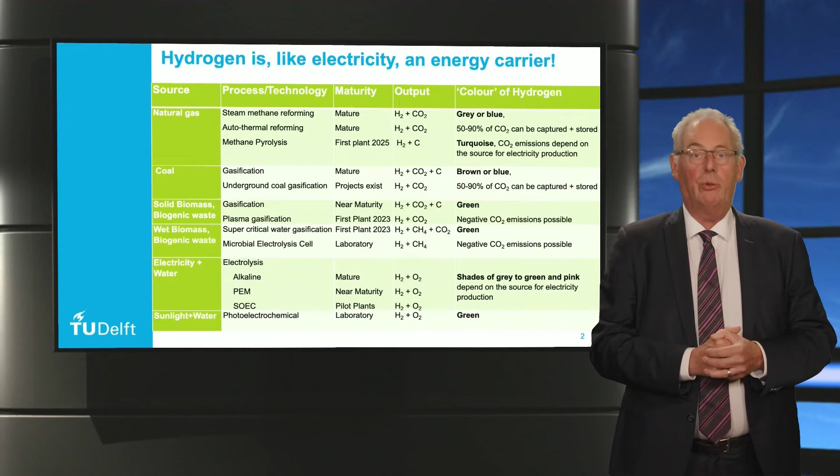First of all, the fossil fuels that are hydrocarbons as molecules, you can split them into hydrogen. But in most of these cases you also produce carbon dioxide, which you can partially capture and store, as can be read in this sheet. However, there is also a technology called methane pyrolysis, where you can split the methane into hydrogen and fixed carbon or solid carbon. Then there is no release of carbon dioxide emissions to the air from this process.

Another way to produce hydrogen is through the use of biomass molecules. And there you can produce it with gasification or with steam methane reforming. The important takeaway here is to see that you also produce carbon dioxide as a byproduct in most cases. But this carbon dioxide is not, of course, fossil-based, and therefore it is called green carbon dioxide, which you can use also as a feedstock in the industry.

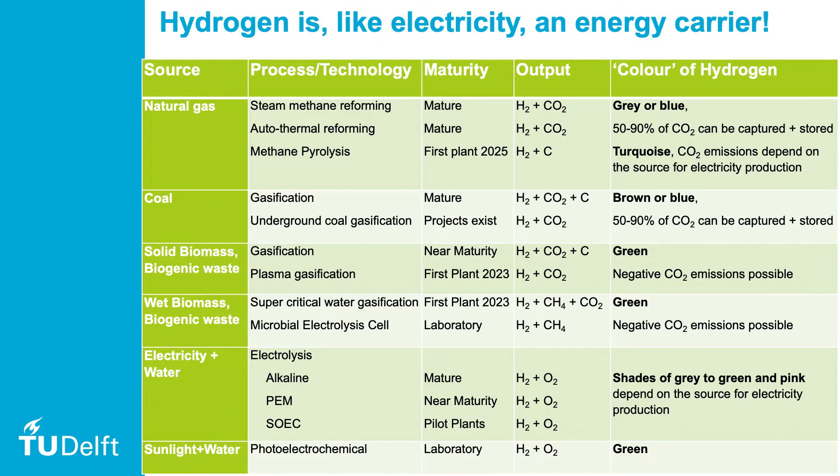And finally, you can produce hydrogen from water. Water itself is not an energy source, and therefore you need to put in an energy source which can be, for example, electricity. For example, you can also put the sunlight directly in the water and then split the water molecule into hydrogen and oxygen. That is called photolysis or photoelectrochemical conversion.

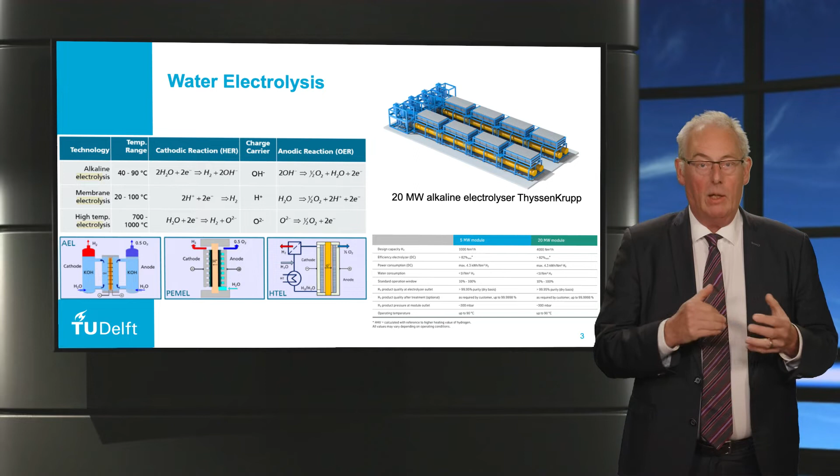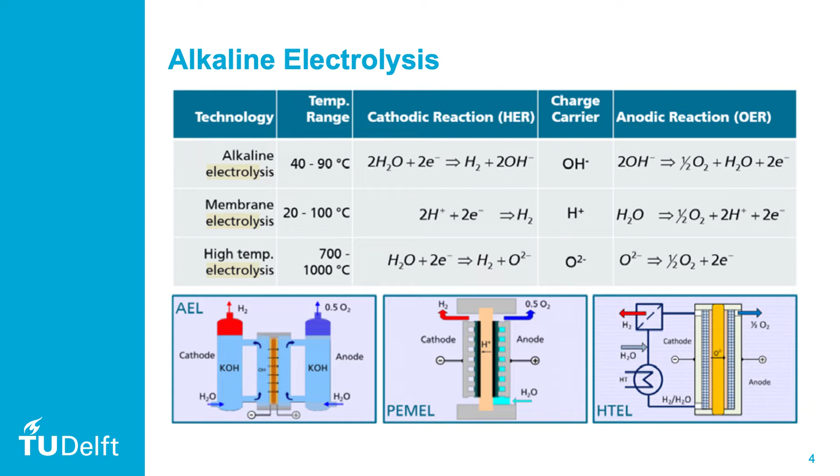But the most discussed and also well-known technology is water electrolysis. And that is what we see today as one of the most promising technologies to produce hydrogen without carbon dioxide emissions. There are several technologies, but the most important is called alkaline electrolysis. That is already a 100-year-old technology. In alkaline technologies, but also in electrolysis, you split the water into hydrogen and oxygen. Also other technologies exist, like membrane electrolysis or high-temperature electrolysis; here you can see the chemical formulas on this sheet.

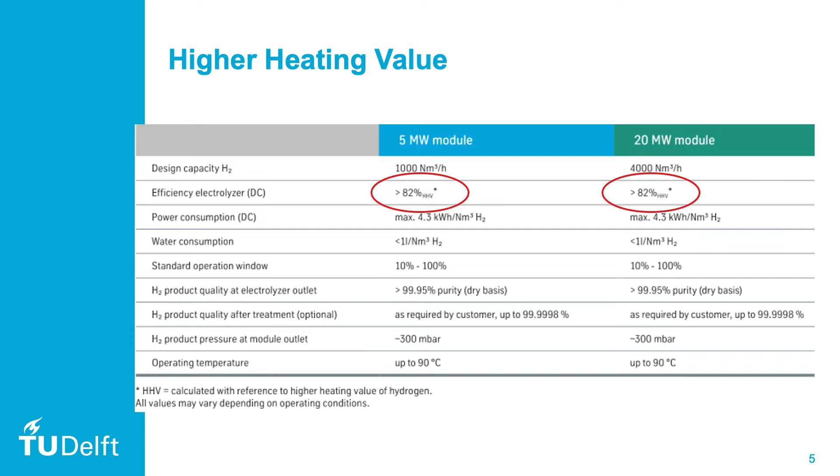If you look at the table, you see that the efficiencies of these electrolyzers are above 80% on higher heating value. You see a lot that they say it is about 60 to 65%, but then they express it on the lower heating value. The higher heating value, however, is the correct way to measure the real chemical energy content of an energy source, and therefore you have to use the efficiency on higher heating value.

And when you look at the technology structure, you see all these blocks above in the sheet. These are stacks of electrolyzer cells with which you produce the hydrogen. In every one of these stacks you see the cells, that are the stripes you see on this sheet, and these cells are stacked to each other to make it a stack, as we call it in electrolyzer terms, a module in solar terms you would say.

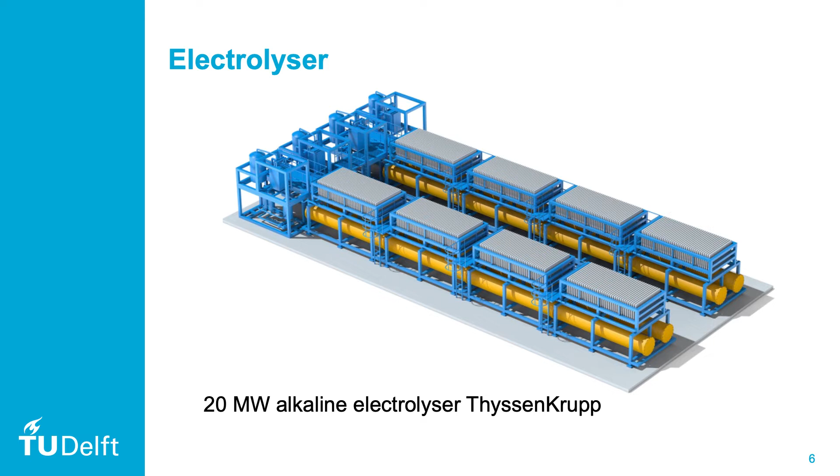And if you need more output, you place more of these stacks next to each other. So the technology structure is similar to solar cells or batteries. There is not a rotating movement, there are no high temperatures, so mass production of cells and stacks will drive down the cost considerably in the years to come.

But why do you want to produce hydrogen? That's the next question. That is because solar and wind resources are not the same at all places on Earth. Solar irradiation is the highest in desert areas. And if you look at the yield of a solar panel over there, then that is about 2 to 3 times as high as, for example, in Germany.

And also wind speeds are very high at several places in the deserts, but also in coastal areas and of course at sea. But normally, good solar and wind resources are far away from the demand locations. At very good resource areas, there are of course low production costs for solar and wind energy. And by converting to hydrogen at these resource locations, transport and storage costs are much lower compared to transporting and storing electricity.

Because by converting to hydrogen, you can transport by pipeline, which can also be the reused natural gas pipelines. For example, here you see the pictures for Europe, most left, of the gas pipeline infrastructure. And in Europe we see that there is also a gas pipeline infrastructure at the North Sea, but also already from North Africa. We have a very large capacity, about 60 gigawatt, coming from North Africa with gas pipelines to Europe. And already 21 countries in Europe have now a plan to retrofit one of the large pipelines into a hydrogen pipeline backbone.

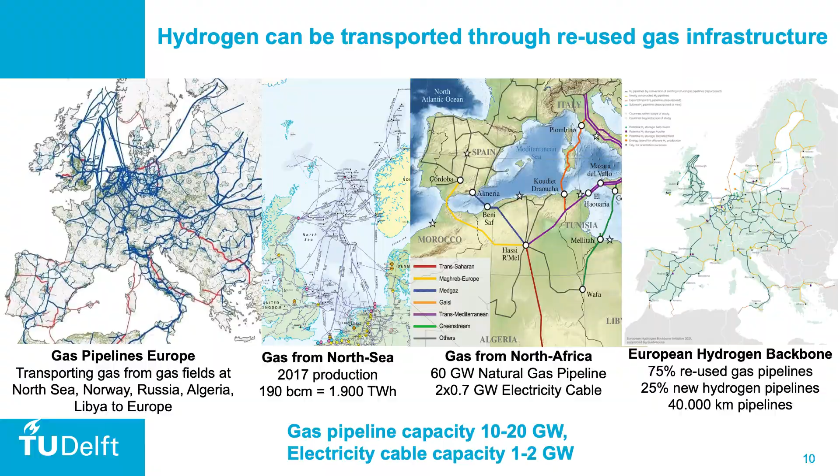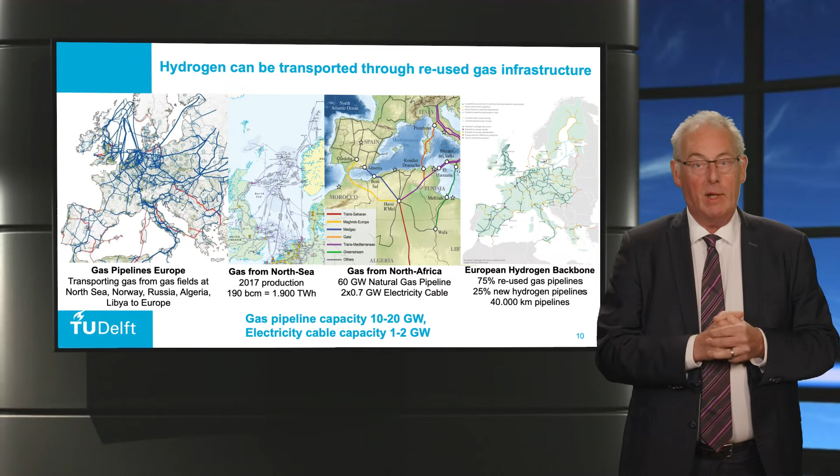If you look to the capacities of these pipelines, they are about a factor of 10 larger than the energy transport capacity of electricity cables. But also the cost to transport energy by hydrogen by pipelines is a factor of 10 lower than the same energy transport by electricity through electricity cables. So transport is cheaper with hydrogen than with electricity.

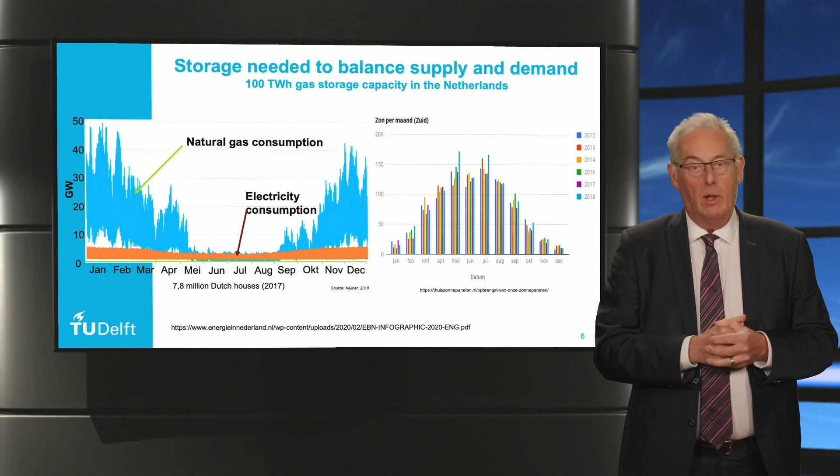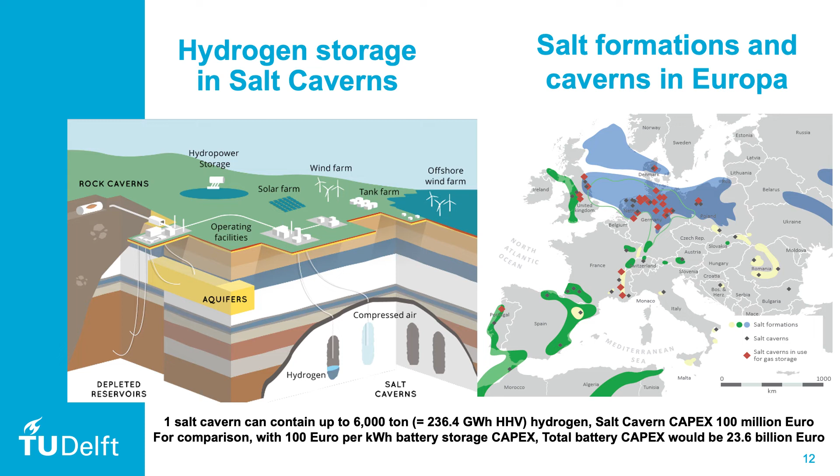To give an idea of the storage volumes, in a salt cavern you can store about 6,000 tons of hydrogen, which is about 240 gigawatt hours. And if you look at the cost to build such an installation, it's about 100 million euros. If you want to store the same amount of energy in batteries, which is of course not suitable for seasonal storage, but if you do that and you use an optimistic price of 100 euro per kilowatt hour battery storage cost, then you have to spend almost 24 billion euros. So you see at least a factor of 100 times more cost to store the electricity in batteries than to store hydrogen into salt caverns.

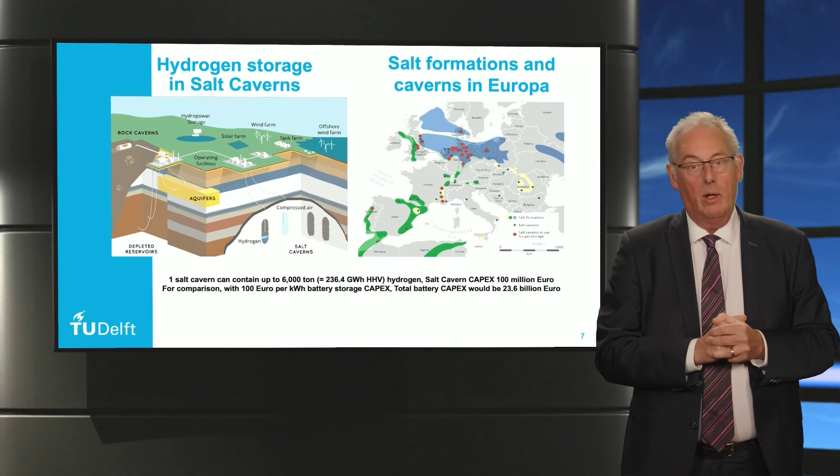And that's the second important reason why you want to convert solar and wind electricity into hydrogen, because the storage costs for hydrogen are very much cheaper than for electricity. So in the end, with the conversion from cheap solar and wind electricity at these places where you have the good resources and also the space, you are able to transport and store hydrogen much cheaper than electricity, and overall cost to deliver solar and wind energy at the right time and at the right place to the demand are therefore lower than when you do this with electricity alone. So this is the first and most important role for hydrogen, to transport and to store cheap solar and wind electricity to the demand at the right time and at the right place.

However, when you look at our present final energy use, currently less than 20% is electricity use. The rest is final use of fuels, or in other words, the use of molecules. Over time, we will use more electricity, of course, but you still need these molecules, especially for feedstock, but also in the industry for high temperature heating, for parts of mobility or space heating, and for storage to balance electricity supply and demand. So molecules are necessary, especially for these so-called hard-to-abate energy and feedstock use.

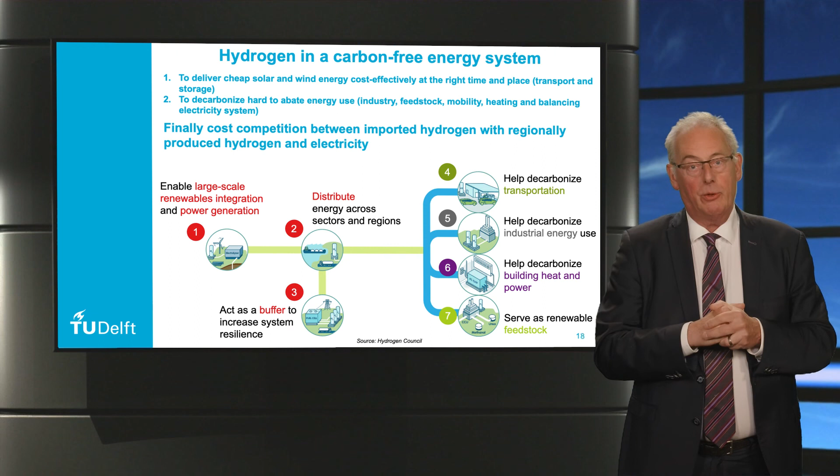But finally, the competition will be in price. That will be a very important role in the future. When we can import cheap hydrogen from, for example, the Sahara Desert to Germany, this will compete with locally produced hydrogen and electricity from solar or wind. And then you will see that there will be much more solar and wind electricity used from the desert areas than from your local resources, but it will be in the form of imported hydrogen. And therefore hydrogen will play a very important role in a future fully sustainable energy.

And let me make a final remark. Hydrogen is a circular energy carrier, because if you produce hydrogen from water by electrolysis, you use water, of course. But next to hydrogen, you produce also oxygen, which is released to the air. When you use hydrogen in a fuel cell or a combustion engine, then you use the same amount of oxygen that you get out of the air, but you produce also the same amount of water again. So really, hydrogen is a circular energy carrier.